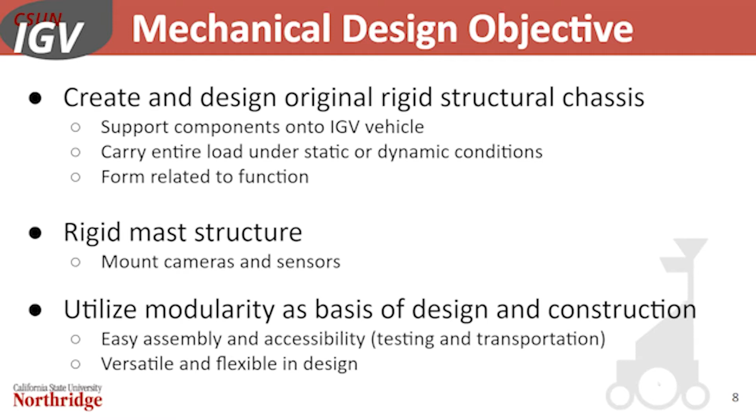Moreover, with some research into other IGVs, modularity was found to be a key factor used by the top teams in the past few years, including CSUN's very own El Toro. So we applied that as the basis of our design and construction. Next slide, please. Here are the images of the mast and chassis designs the mechanical team has been working on. First, I'll be going over the mast. The mast is designed to be a rigid mounting structure to be placed on top of the chassis and to mount the cameras and GPS antenna.

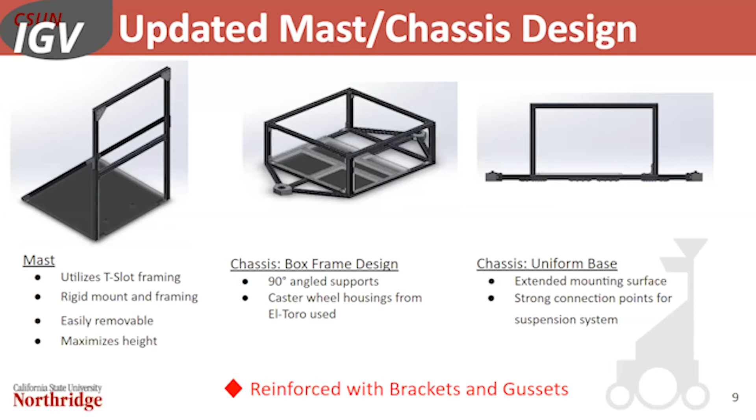The chassis comes next. The box frame design is incorporated with straight vertical supporting members to increase the top surface area for a better fit for the laptop and 18-inch long payload. The bottom surface has been leveled as well to not only increase the area for mounting components, but to provide strong connection points to the suspension system. Next slide, please.

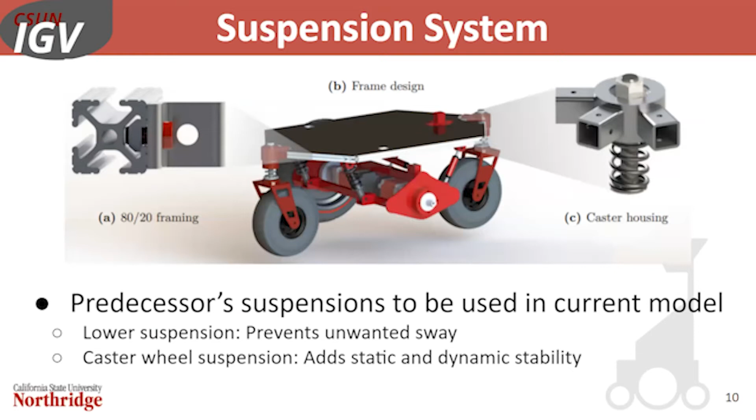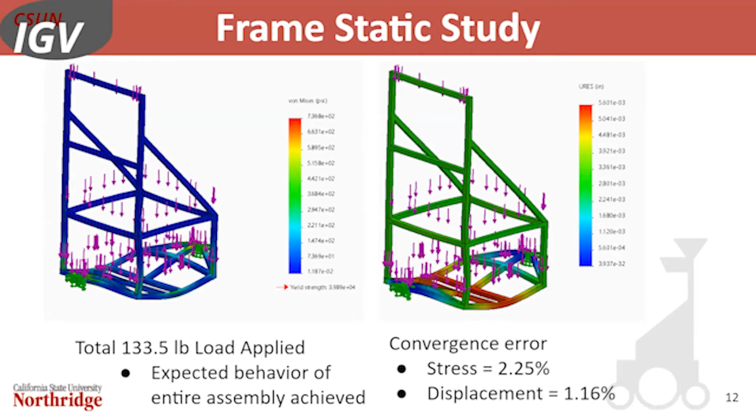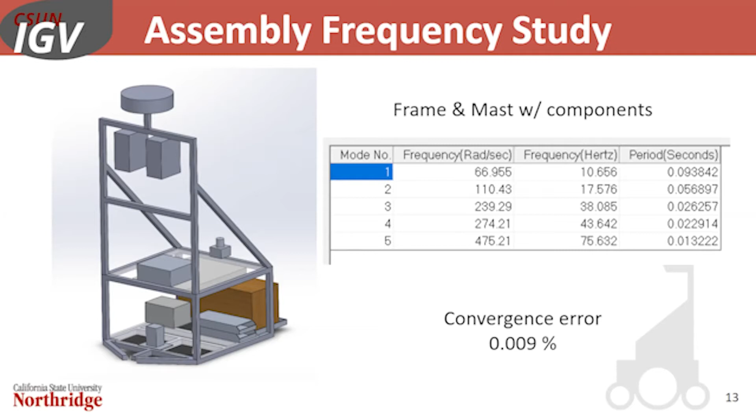And here are the results of the frequency study done on the entire frame. Unfortunately, we were unable to include the suspension system in the simulation, and we were missing correct information about the spring constant of the frame. Thus, we treated it as a fixed point. With the suspension system, however, the expected frequency for mode 1 is to increase. Finally, I would like to talk about our cooling system.

Thanks, Julian. So what exactly is the electrical power team? Well, in short, the goal of the electrical team is to control and provide an adequate amount of power to the intelligent ground vehicle, as well as improve overall efficiency and lower manufacturing and maintenance costs. Next slide, please.

So this semester, as far as battery pack design and assembly, the team used Energus Power Solutions 2x4 battery modules. Energus is a Lithuanian-based company who have a reputation of providing simple, lightweight, and high-density battery solutions to engineering teams and hobbyists all across the world. And what's nice about these modules is that because we would be connecting them with copper bus bars and standard fasteners, we could avoid soldering and spot welding, which is really important when you consider student safety in a project, and in particular, the overall design of a battery pack.

And this semester, we tried to create an even better battery pack than the previous IGVs while tackling the task of putting it together by ourselves, which is something new to us and something that many other IGV teams haven't done. The idea for the team this past year was to mimic Tesla Motors' battery pack concept by using standard 18650 lithium-ion cells, which were chosen because of their high energy density and their relatively low cost. Next slide, please.

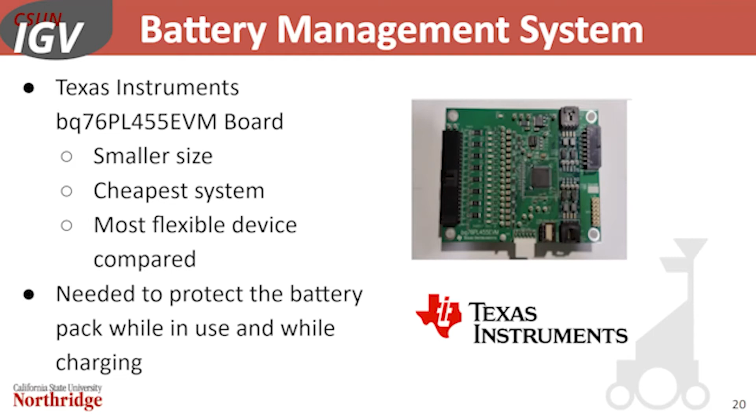Some other components that we needed to look at and decide on were our motor controllers and a high current clamp for our controllers. The motor controllers are used to interface with the logic and code from the system's computer to drive the motors, whereas the high current clamp protects the rest of the system from a backdriving voltage that could possibly damage the system. These components were already on the existing IGV, and money could be saved since the team decided they didn't need to be replaced or upgraded this semester.

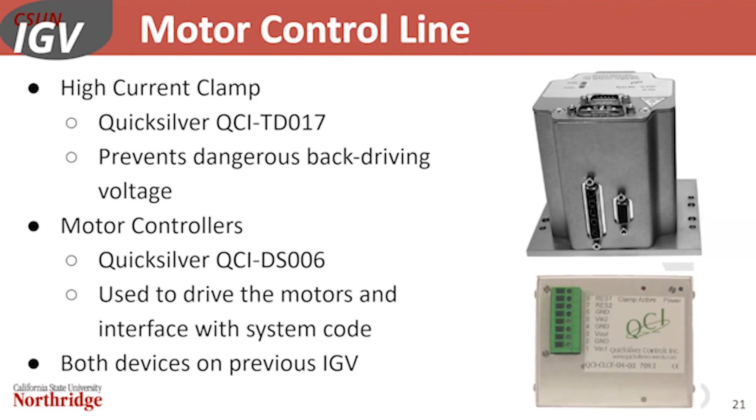Next slide, please. The electrical team also uses Cadence Allegro and EagleCAD to simulate and create the respective board for power distribution purposes for the IGV. And these simulations were used to obtain the desired output voltage and output current to the system before selecting an appropriate vendor to manufacture the board itself. Next slide.

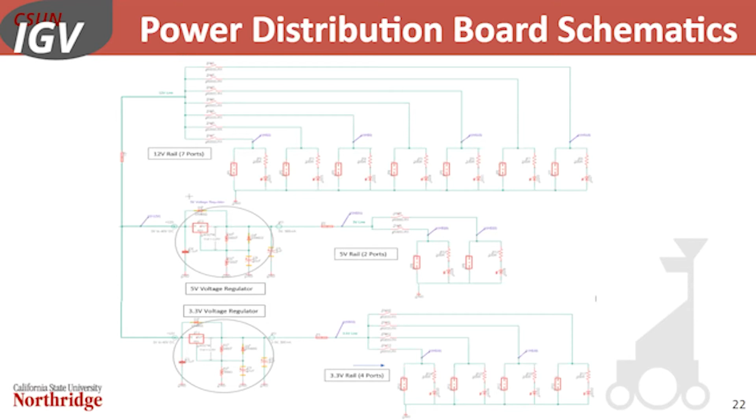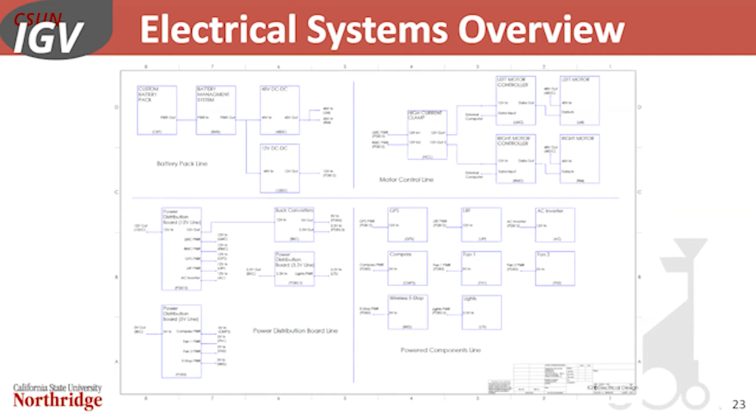And at last, in an effort to simplify and streamline connecting the IGV's components to their respective power sources, we constructed a diagram on SolidWorks that provides an overview of the different components of the system, what type of connection each component has, and where it connects to. Our goal was to create a template to simplify the wiring of the IGV to the point where someone unfamiliar with the system could understand how to properly connect everything. And next is Eden with the IGV's navigation and path planning. Thank you, James.

Our all-encompassing design goal was to design a reliable autonomous system that will stay relevant for multiple years to come. This specific map incorporated barrels, GPS goal points, white lanes, and flags. We have also accounted for ramps, gates, and more since they have shown up in the previous year's maps.

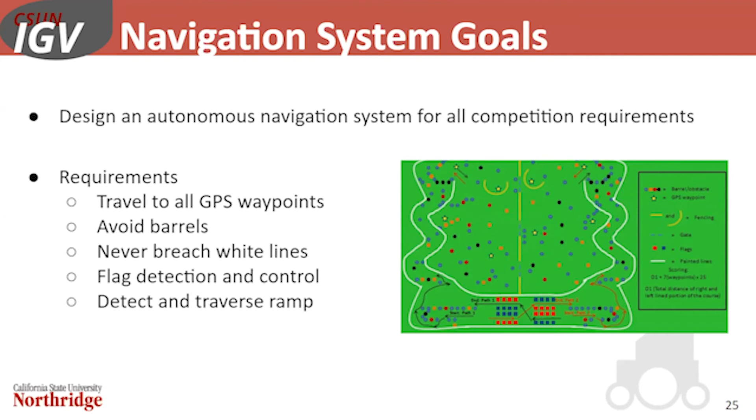All the obstacles cannot be handled by a single vision system, so we're incorporating multiple sensing methods to accomplish our goal. To deal with the spray-painted lines, we're using an RGB camera with 2D image processing. For the ramps and flags, we're using object detection. And finally, for the taller obstacles, we're using a 2D LiDAR sensor for SLAM navigation with GPS integration.

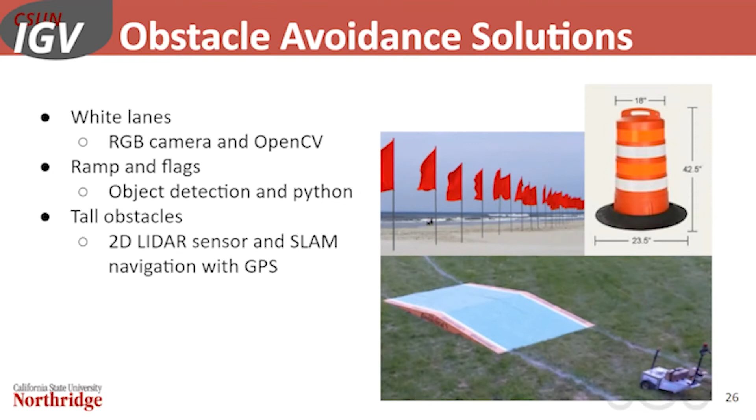To handle all these simultaneously running systems, we're using the Robot Operating System for operation and development. ROS allows us to connect independent programs and utilize lots of open source software. Here's our system architecture from sensor input to data processing to motor control. The following navigation methods all publish velocity commands independently, so we use a velocity multiplexer to prioritize the incoming commands for the motors.

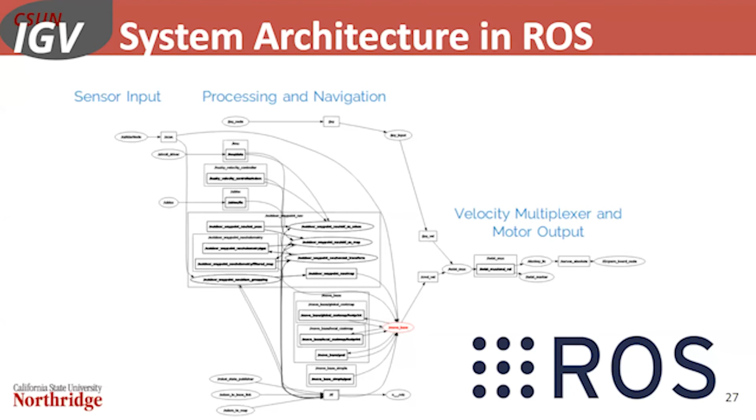SLAM is a method of simultaneously locating the robot and mapping the environment. This solution pulls data from the inertial measurement unit, the 2D LiDAR, and the GPS sensors. These sensors come together to create a map for the path planning algorithm to use for navigation. On the right, we have a SLAM system running with no form of autonomous navigation or path planning, just for this depiction. ROS allows us to convert GPS coordinates to local navigation goals for the IGV to move towards.

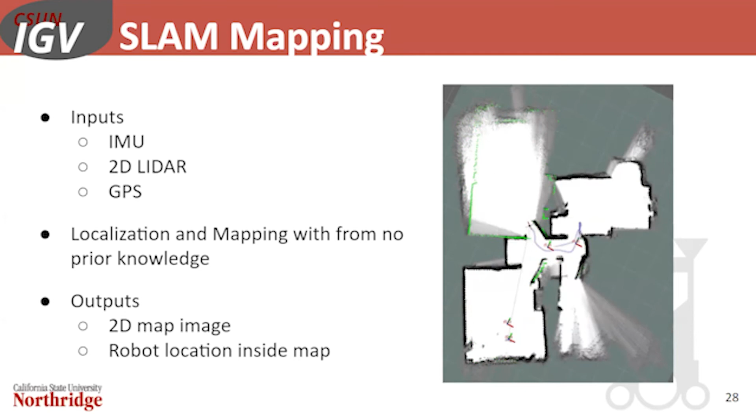For the lane following problem, we are using our wide lens cameras to see these lanes. This video feed then goes through an image processing program to find the correct motor controls needed to follow these lanes. In summary, we blur the initial image, convert it to grayscale, and isolate the brightest pixels since we are isolating the white lanes. We can then create virtual lines using OpenCV's Hough transform to give us our final motor control.

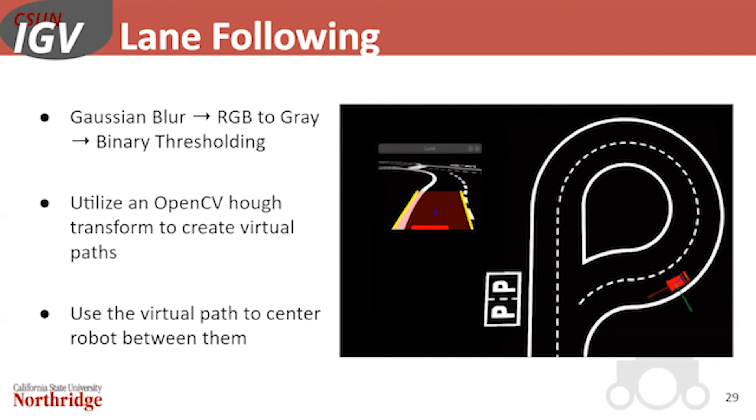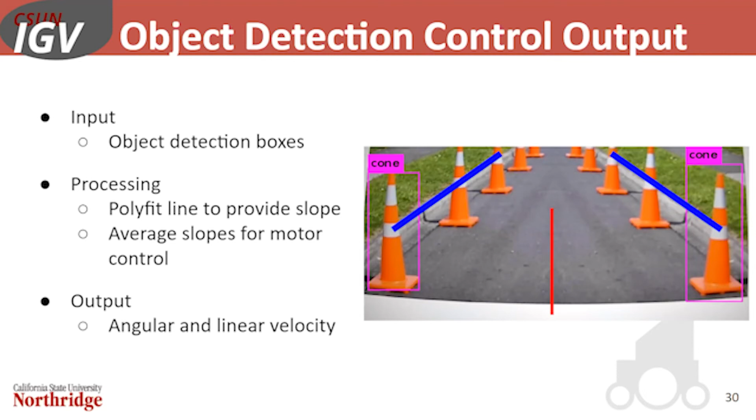To end our navigation algorithm, we are using object detection to find certain objects in the video feed and create motor control outputs based off those images. These objects would be depicted incorrectly or not depicted in vision or purely SLAM. In this frame, we have created a custom object detection model that specifically detects cones. We can then use these located cones to create virtual lines using a polyfit and center the robot between those slopes.

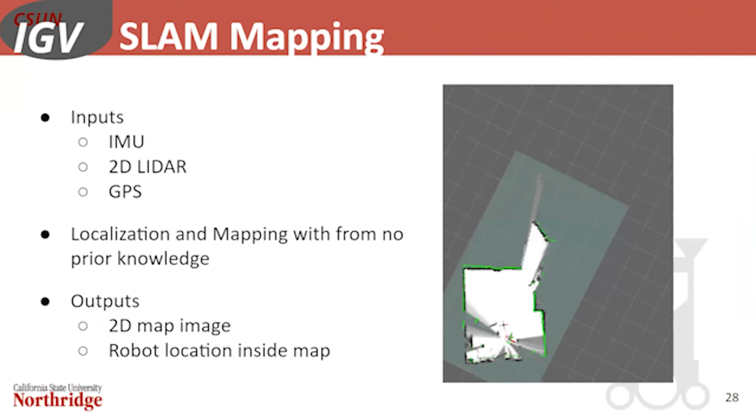Hey, yeah, I have a couple of questions. Of course. I don't know if I missed it, but is there any mass or weight criteria? For the competition? Yeah, that's right. So there's no weight criteria, but we did try and reduce the weight from previous years. We also tried to reduce the center of gravity from previous renditions of the IGV. Specifically, the robot is 190 pounds. It's a weight reduction of 20 pounds from our previous iteration. Cool, but there's no competition-driven criteria. No.

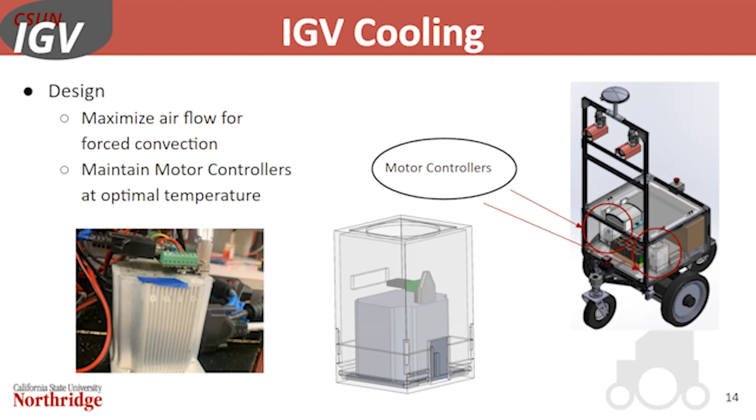And then just a question about the cooling design. Is there an over temp condition, or what ambient conditions did you assume in the analyses? We had assumed room temperature, just standard. It was a little bit problematic because we had been using another simulation, ANSYS, to get the temperature values for the battery cells. Then we used SOLIDWORKS flow simulation and specified 41 degrees C to each individual battery cell, and an ambient temperature of 26 degrees C. Then we played around with the different velocities and external and internal studies.

But admittedly, it was a bit difficult because there was no formal class on flow simulation that I had taken, and ANSYS was very difficult, and people had said that flow simulation was the best option for students like us. Did you think about doing any hardware testing with some thermocouples and fans and see what temperatures you're seeing? Truthfully, a lot of the semester was spent doing these simulations and design because of the whole COVID situation. And personally, I didn't get to go into the lab. Cool.

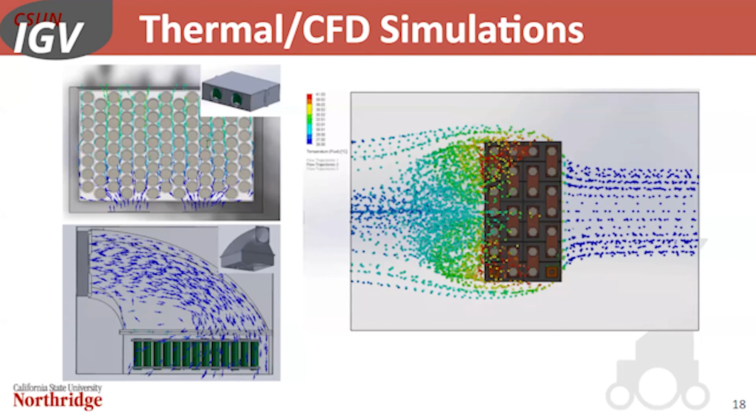We implemented the GPS into our SLAM navigation. ROS allows us to use a specific node called GPS goal, which will translate your current GPS position and your goal position that you publish to it into a local path. Got it. That's great.

There's a quick question from Professor Bishay. He just wants you to clarify: did you start in spring 2021 or fall 2020? We actually started spring 2020, and that team lasted until fall 2021 in December, and then they handed off to our team, and we built this robot for the 2022 competition, and we'll do the physical manufacturing for that competition.